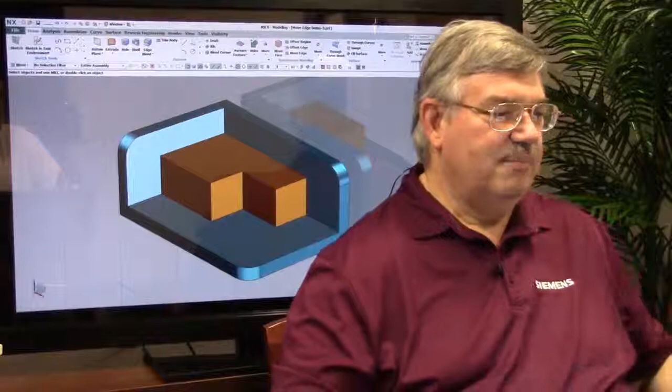For example, I have this part here in which I've been asked to move one of the faces. I need to set it at an angle. So I'm going to pick the face and move it at an angle, and the specification says 30, which I read as 30 degrees, so I move the face 30 degrees. Unfortunately, it turns out that I misread the spec. It really wasn't moving at 30 degrees, it was moving at 30 millimeters.

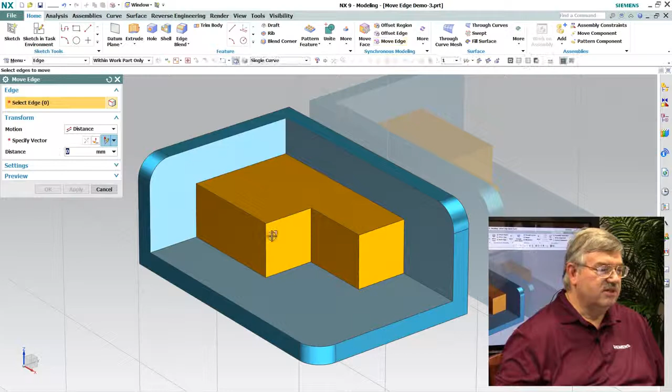And so what I need to do is now go in and use the new function of move edge. So I pick the edge and I say 30 millimeters, and now I've moved the face at an angle. Again, the face has been moved at an angle, but I didn't use an angular measurement. I actually offset the edge using this new function.

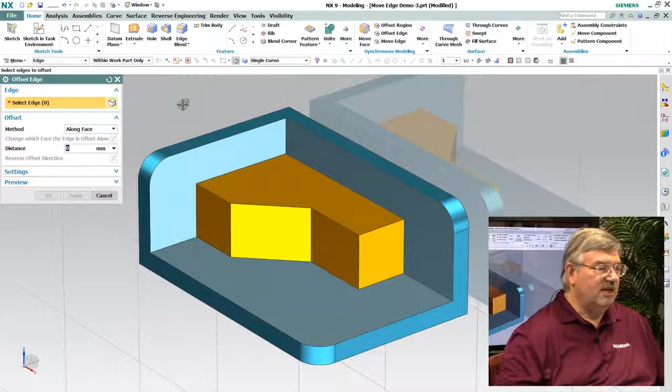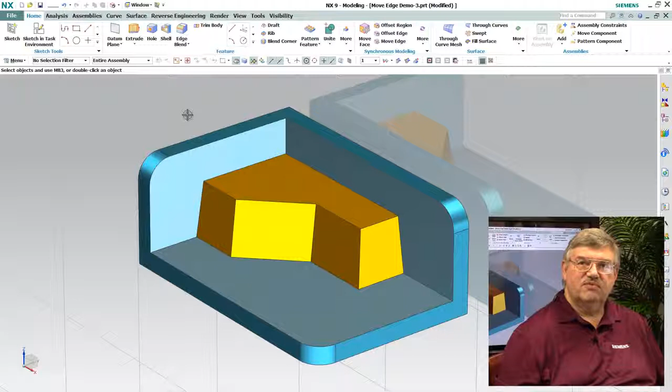And we can do the same thing. For example, somebody may say I need to add a draft to this model, but again, he doesn't have the angle, but he knows what the setback is. So there's an additional function called offset edge, where I can take a series of edges and offset it. For example, let's say 5 millimeters. Again, I don't know the angle, but I do know that 5 millimeters is what the specification said. So again, a perfectly valid way of adding draft to a model without knowing what the angle is.

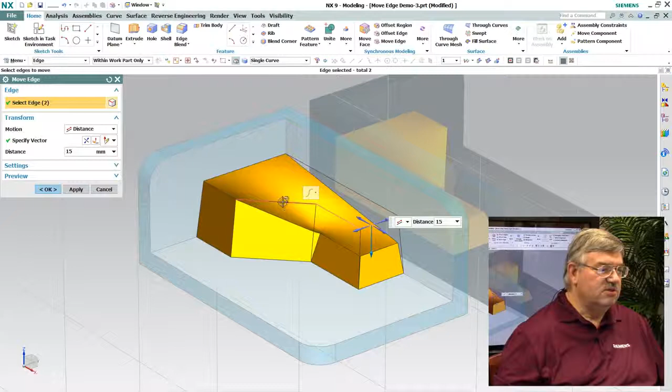Now, there are some interesting things you can do with move edge, because what you've seen so far is pretty straightforward, but I could also come in here, grab an edge, for example, and move it in this manner. And picking up the additional edges here of this face, I've actually created a very complex shaped face now on this model. And again, I could move it up and down to change the height of it.

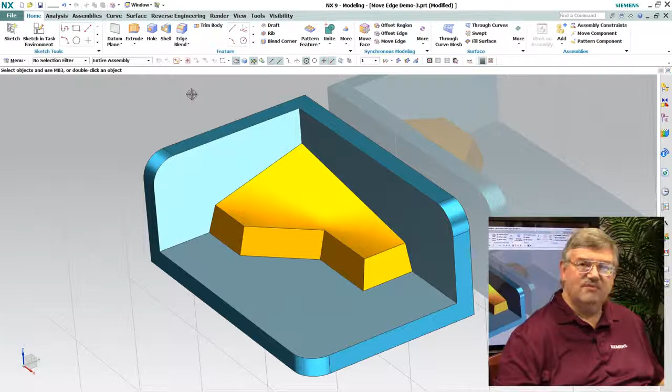Again, a perfectly valid model, but one that would be very difficult to model even with the advanced surfacing techniques that NX offers you. This is really a very easy to understand and straightforward way of making that complex shape.

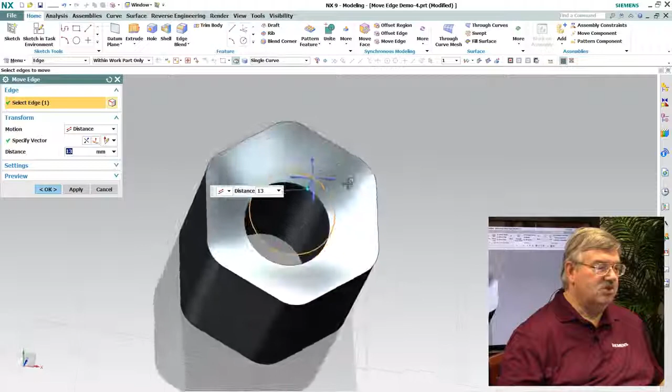Now this actually leads us to another interesting case. For example, I have this part here, a very simple part, and I'd like to apply a shape to the top of this face here. I can simply come in here, grab hold of this edge, and just simply move it down, creating sort of a very complex shaped depression in the top of this part, simply by just moving that face down.

Again, yes, there probably are some surface modeling techniques that one could have used, but they would have been much more complex, required many more steps, and multiple feature operations, where here I can just do it in a single operation. Anyway, thank you very much.